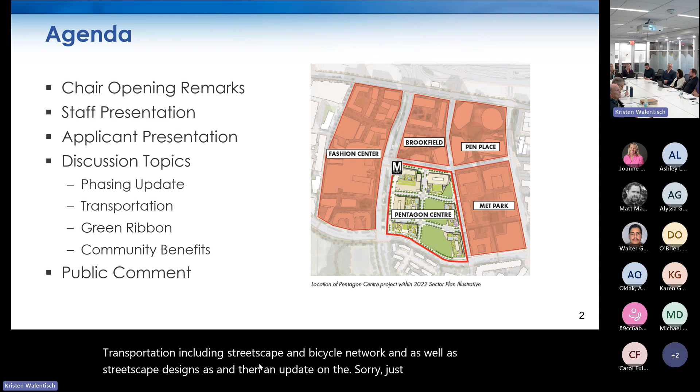We'll have the staff and applicant presentation. Discussion topics will include an update on phasing, transportation including streetscape and bicycle network, streetscape designs, and an update with additional conversation on the green ribbon. If you remember, we discussed this at the first LRPC, but some details have come up that we want to reintroduce to the LRPC and elicit feedback. Finally, we'll discuss community benefits and then move into the public comment portion of the meeting.

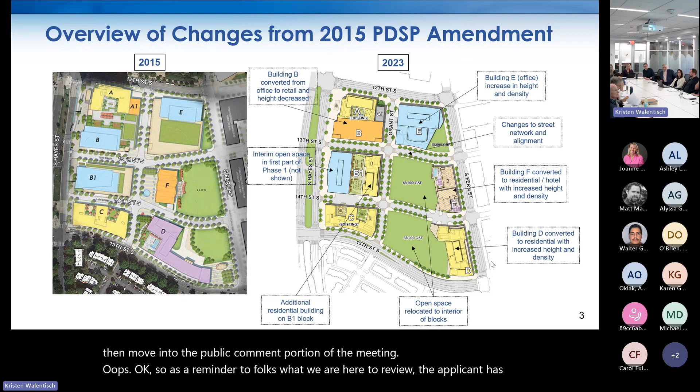As a reminder, what we're here to review: the applicant has submitted an application to revise the Pentagon Centre PDSP to make general changes to the site layout, density, building height, open space, and various transportation-related aspects of the PDSP. This was last amended in 2015, originally approved in 2008. At this time, the request does not include a final site plan for any specific building or block development, so this public review process is intended to focus on the more high-level changes being proposed.

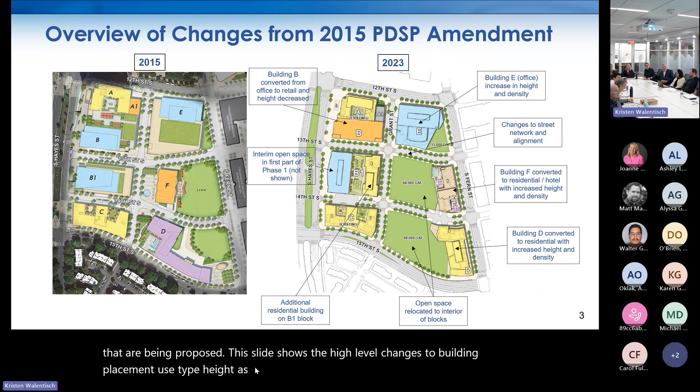This slide shows the high-level changes to building placement, use type, height, as well as location of open space. As a refresher, we went into more detail on this during the first LRPC. These are the Pentagon Centre guiding principles, established in 2008 with the original PDSP approval, to specify the goals and objectives for the site in the nine areas of redevelopment listed on this slide. We will be evaluating the proposed PDSP amendment's conformity with these guiding principles.

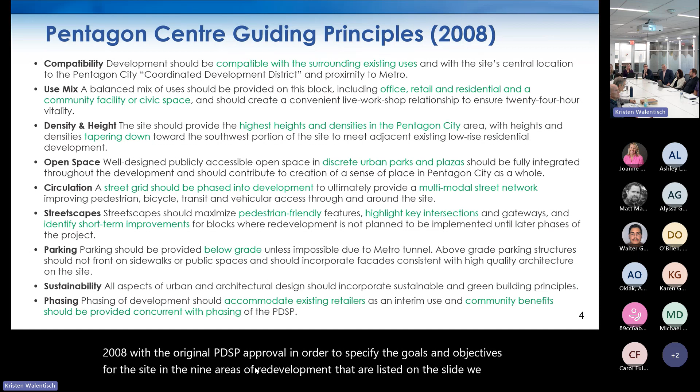Also, as a reminder, the site is the hole in the donut of the Pentagon City sector plan. It's surrounded in its entirety by the sector plan, but the site itself is not located within the sector plan. Although Pentagon Center is not located in the sector plan boundaries, the sector plan utilized the 2015 Pentagon Center PDSP framework to plan for the surrounding area located in the sector plan. We've identified certain aspects of the sector plan appropriate to apply to the Pentagon Center PDSP application, which we discussed at the first LRPC and will continue to discuss today regarding transportation and community benefits.

To help guide our review of the proposal in the context of the sector plan, we have six guiding principles. One question to keep in mind is how the proposed PDSP amendment helps fulfill these guiding principles, or to identify if there are aspects of the proposal that fall short of these goals.

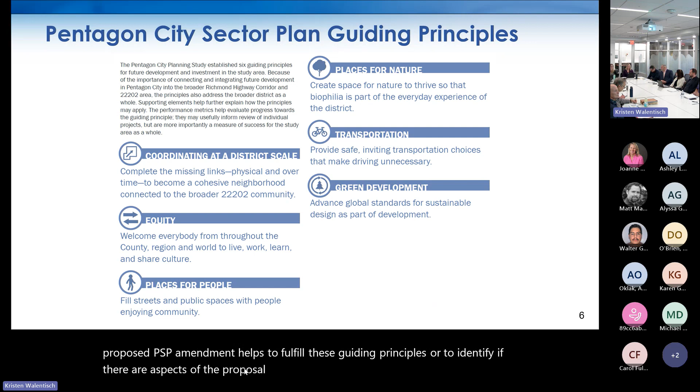Getting into our first discussion topic, we'll go over a quick update on the proposed phasing. As a result of the discussion during the first LRPC meeting, staff raised two concerns to the applicant regarding the phasing. First, the phasing did not account for a scenario in which Costco could decide to extend their lease past the current expiration date. Second, it pushed delivery of all open space for the block to occur within phase 2, avoiding any near-term benefits to the community within phase 1.

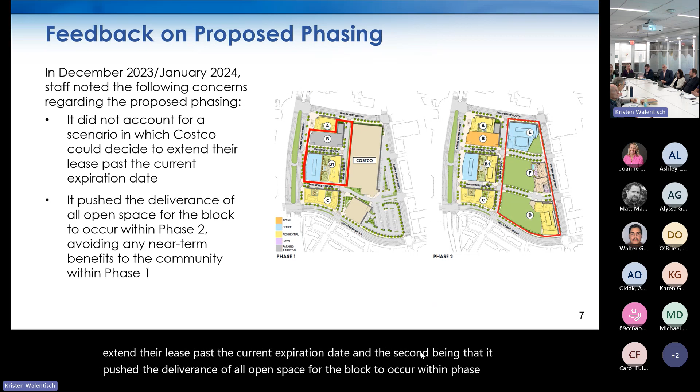As a result of that, we met with Kimco and discussed a couple options to help alleviate these concerns. Kimco has agreed to revise the phasing so that the B1 block delivers an interim public open space along South Hayes Street within phase 1, and then the office building proposed on B1 will be pushed to phase 2. That's shown here, and Kimco's presentation will have more information on this.

A development condition will require that the public open space remain in place until phase 2 is under development, which will deliver the remainder of the open space on the eastern portion of the site. This ensures the site isn't developed with any lack of open space throughout the entirety of the project, that full build out.

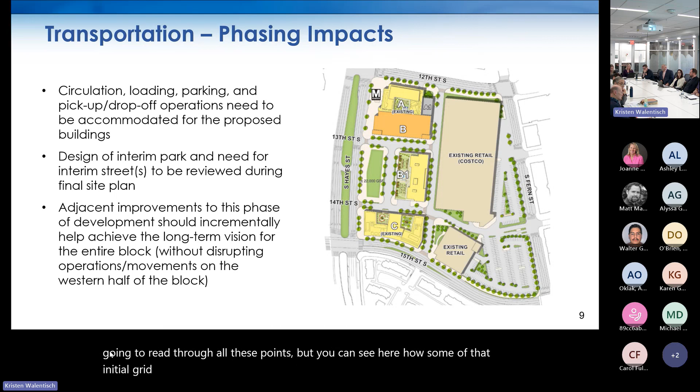Moving over to transportation phasing impacts. As you can see, a lot of what's being shown here resembles the 2015 vision. The phasing impacts, however, I think are going to be very critical to establishing some of the initial street network improvements. I'm not going to read through all these points, but you can see how some of that initial grid improvement, particularly on the eastern side of the block, is likely to be implemented in the next phase, the B1 residential building that Kristen just noted.

Currently, there's a street separating the interim park space from the B1 building. Once that site plan is filed, we'll have a better chance to evaluate whether or not that street is actually necessary, and maybe potentially could expand the park space there, considering that two additional segments, 13th and 14th, are being introduced with that phase, as well as the Grant Street segment that would continue north-south throughout the block. So depending on what the details are of that site plan, that might inform the exhibit you see here, and any further evolutions that might exist.

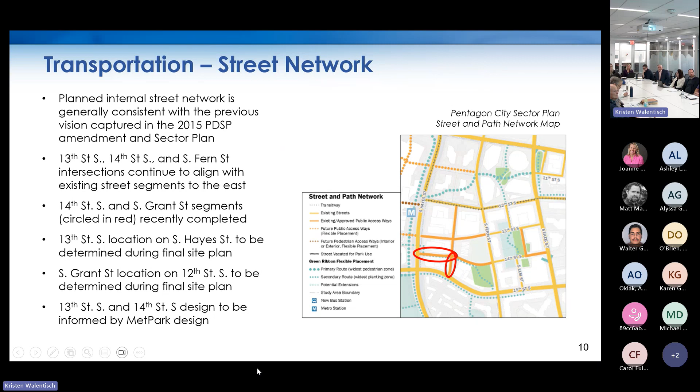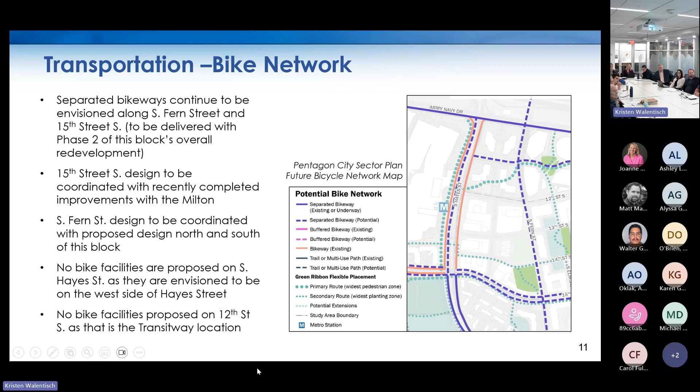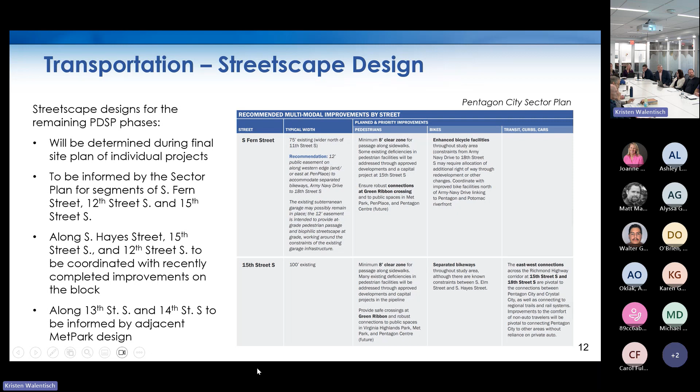Lastly, from a transportation perspective, the streetscape designs are also borrowing heavily from the Pentagon City Sector Plan. Similar segments, whether it's 15th, Fern, and surrounding properties, are specified in that document in terms of the expectation for sidewalks and streetscape environment details. As I mentioned, depending on where we are and which phase of development we're reviewing, we're going to be looking to amend that guidance as well as consider and align with existing conditions that have already been constructed with the first two projects on this block. So depending on where we are in the phase of development, that assessment is still ahead of us at such time as we receive an actual site plan that has more details and allows us to assess what's appropriate. Next slide.

Shifting gears from transportation, we wanted to note the Green Ribbon Network and how this block helps contribute to additional connectivity. The Pentagon City Sector Plan at the time was utilizing the 2015 vision for this block, which informed the alignment of that green ribbon to continue following future segments of 14th Street as it reached the southeast corner of the property.

Future park space was allocated there. Given that open space is being reoriented and reallocated throughout the block, that poses an interesting question of whether 13th or 14th Street should be more appropriate to deliver that green ribbon connectivity and allow folks to traverse the site from east to west.

With this next phase of development, likely looking at the Hayes Street B1 property we saw earlier, as that site plan is filed we may learn more and identify which of the two streets, 13th or 14th, is more appropriate to provide access throughout the site and to future open spaces, as well as the best connection into Met Park and most convenient access across Hayes Street, which is challenging since we're not expecting the west side of Hayes Street to develop anytime soon.

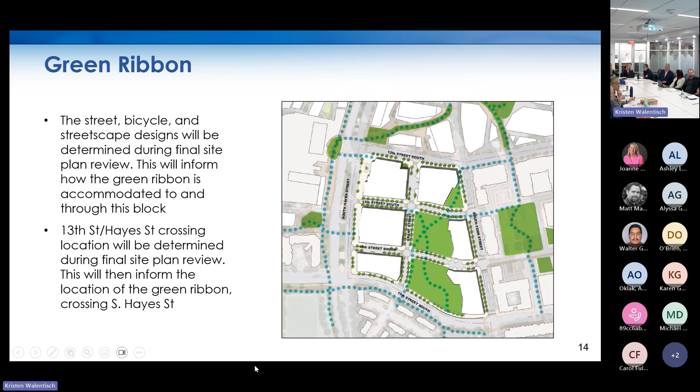We're carrying the expectation, as we look at the next slide, that in addition to the public open spaces, the green ribbon segments are expected to be accommodated on this block. Part of the community benefit structure, similar to what we have in Pentagon City, will be not just the design and construction, but also maintenance of those public amenities throughout the entire block.

In addition to LEED Gold certification or higher, there's also an explicit expectation for on-site affordability. We felt this exhibit, which documents the additional residential density called for in the PDSP update, is a good way to highlight the approximation of what the on-site committed affordable units might be, factoring in where we landed in the 2015 discussions and that density level compared to what's being proposed above and beyond that.

This gives a sense of what that commitment could be based on the information submitted. We're going to continue working to ensure there's an incremental approach to delivery of these various benefits with each phase of development, most notably the open space, which is a critical element for this entire block. With that, I'll hand it over to Chrissy.

We are anticipating this to be the second of two LRPC meetings to review this PDSP amendment. The applicant will resubmit their PDSP plans to address feedback received during LRPC and comments received by county staff during our internal review of the application. The project will then move on to commission and advisory group meetings, followed by county board action, which we now anticipate to occur in late spring, early summer. That concludes staff's presentation, so we'll turn it over to the applicant.

This is big enough. All right, welcome everybody, thanks for having us again tonight. We appreciate your time. Do you want to give a brief introduction? Given the update that Chrissy did, Chrissy and Matt, we have some updates to talk about on our end. Looks like it's not going to work. I've already changed slides on my computer. I won't let you advance. My Wi-Fi isn't very strong in here, I'm wondering if that's it. Maybe Chrissy, do you have it? I have what you sent me on Friday, if that's fine. Yeah, we haven't changed it. Okay, you want to? Oh well, just a little behind, it's very behind.

It's worth the wait. Excited. Hang on. Feels like an art history class—interpret, what's the meaning, the slow slides are coming up. Hang on one second, I'm sorry. Sketch from memory, yeah, two minutes. All right.

I don't know, hold on. All right. Okay. All right, I think I got it. Oh. Okay. Yay, all right, thank you.

You can go to the first slide. We wanted to remind everybody of the overall layout. The metro station is located right next to Tower A, the Whitmer, which opened in 2018. Block C is at the bottom of the page, that's the Milton which opened last June. So really what we're talking about is the remainder of the site in between. Today it consists of what we consider the mall, which is Best Buy, Nordstrom Rack, Marshalls, Five Below, CVS, Newell, as well as the Costco itself and its precast parking garage.

You can go to the next slide. So really, Chrissy covered this, the phasing. Go to the next one as well. This is that phase 1 plan, and really the idea is that B and B1 would be the first things that happen, with the interim park on the office portion of the B1 parcel.

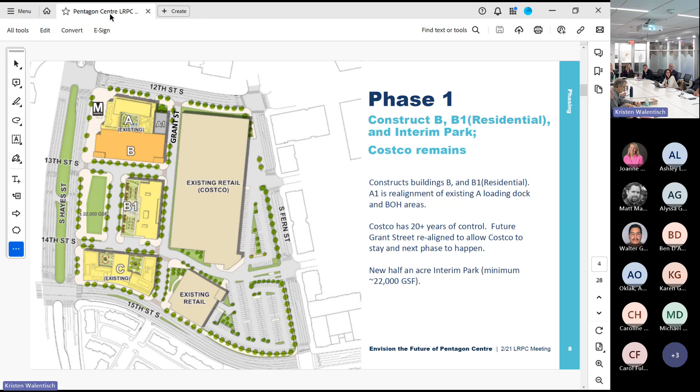Here is the full build out, and we wanted to give you a scenario of what we think a phasing option would be. Obviously this is pie in the sky today, but the idea would be that after phase 1 construction with the interim park, what would happen next is potentially we would open a portion of the park, in this scenario on Block F, that is as big, if not bigger, than the interim open space.

Then at that point in time, potentially the D residential and park would also be under construction. Phase 2B would be the office building on B1, and then the hotel and residential tower on F after the park opens in the previous phase. The final portion could potentially be the office building and park on E. So there's a staggering, but as long as the interim open space is replaced before B1 goes, that would be our proposed phasing here.

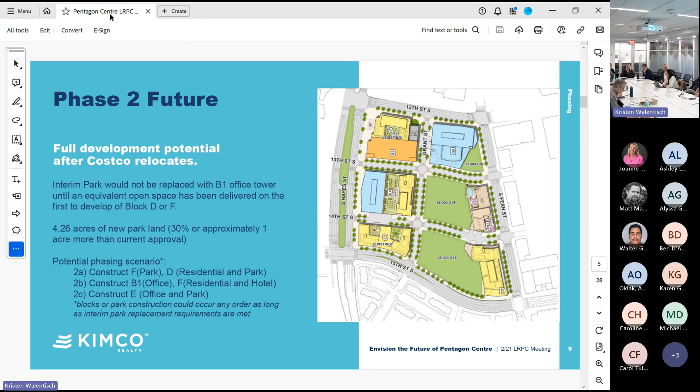Next slide. This is a little hard to read on the screen, but we wanted to share what would happen with the building if there is parking access off this interim road. On the left, you can see the garage is entered off the interim road. Then in the future phase on the right in the box, you can see it basically adds a turn down to the south.

We're still quite a ways off from deciding this, but we want to leave the flexibility for this because we think in the long term, having a ramp entrance across from the park is not the best scenario. So we'd like to leave the flexibility for this just in case, as we figure the details out as we move forward. Nothing has really been finalized, and we'll continue as we move to the site plan with this in the future.

Keep in mind, from this view, the Milton, the newest building, is on the bottom of the page, and its loading already faces this way, which is why we thought it's important to load here on 14th Street, because we already have loading there. That gives us the ability on 13th Street to make it more of a retail street and not have the interruptions you'd have with loading and all that. So that was our thought process in how this building would load, to mirror what we already have today.

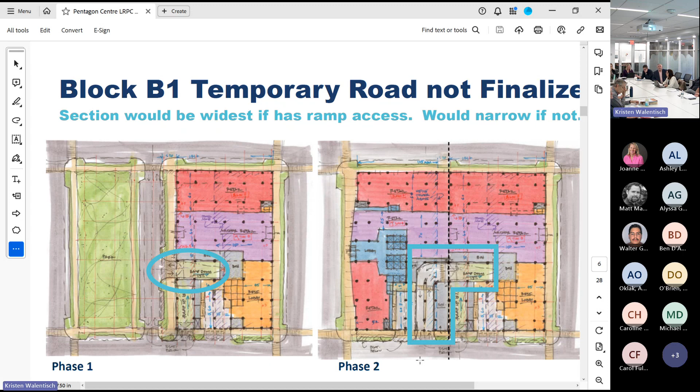That really makes that portion of 14th Street a service street, right? So you have the service back to back, and we create hopefully a great retail environment on 14th Street that gives us back and forth retail on that. Are there any questions on phasing? Because I think this is our last phasing slide.

Not yet, okay, all right. Well, just before you leave that, Abby, is it worth pointing out that interim street we're showing kind of tees up with the existing pathway that connects from the metro to the Milton, right?

Yes, so the path actually, it's just left to where the mews is, from the existing Milton. It does kind of go to the right a little bit, and the end goal would be that it connects you to the future residential amenity lobby of the future building. So that's where the connection will take you after the mall goes away.

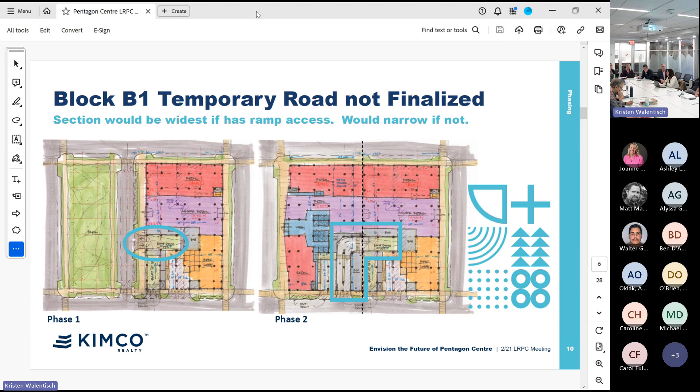All right, we can go to the next slide on transportation. So here is kind of the maps, if you will, from our design guidelines, so you can see what we're thinking about both with the streets as well as the bike lanes.

On the left, you can see that we're thinking about Hayes, Fern, 15th and 12th as arterial streets. And then we've got local streets, both Grant Street and 13th Street. And really we're thinking of 14th as our service street, like we just talked about.

We're adding the dedicated protected bike lane on Fern Street as well as on 15th, where the new development will happen, where we can pull the building back. There is a bike lane today that was added with the Milton on that portion of 15th Street. We don't have the section at this point to add it protected, but the rest of it would be. Hayes Street exists today, and we would be providing hopefully slow streets for sharrows through the middle of the site.

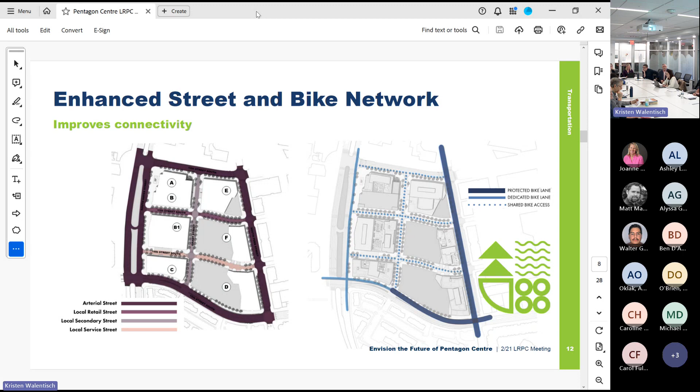Next slide, please. The goal really is we just wanted to let you know how much it is, almost over 1,600 linear feet of new protected bike lanes, which is a third of a mile.

We do want to make sure that we are coordinating with the 12th Street Transitway, so we are working with staff to make sure 12th Street works as that gets added in the future. We'll be having some coordination with staff, but our next application will fully have all of that detail because they shared the latest plans with us.

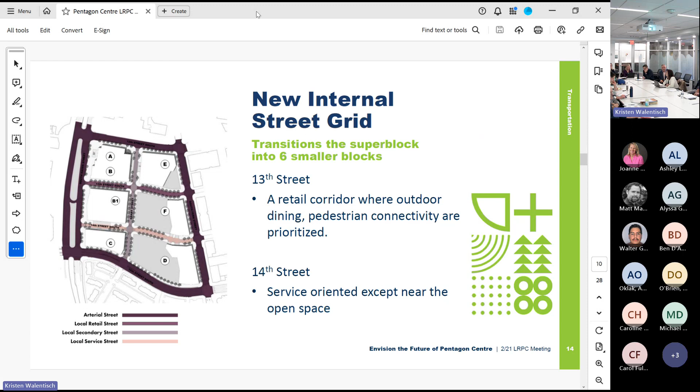Really, this is kind of basically what we've already talked about, but the goal is that we're fully creating porous 6 blocks rather than the super block there is today. You can actually skip 2 slides because I think the next one just says Grant, which we've already talked about.

And so here is the street sections. Again, these are pulled from our design guidelines as well as from the document set. The big thing here is what we've really done is we've added increased width for the step off from the parallel parking. So basically, instead of just a 6-inch curb, you now have 14 inches before you start the 6 foot for the tree planting zone.

The other big difference is what we're saying is a variation from a building zone of 2 feet to 20 feet. And that allows for the vibrancy to have outdoor dining in specific locations, as well as an undulation of buildings for where entry points are. So really that's the big point. Overall the building face to building face could be somewhere around 100 feet if the full 20 feet is used on both sides.

We did want to mention that while we are showing parallel parking on both sides, there is an opportunity at the parks and on our retail street to close it for events, so we could have the ability to create celebration streets in those environments.

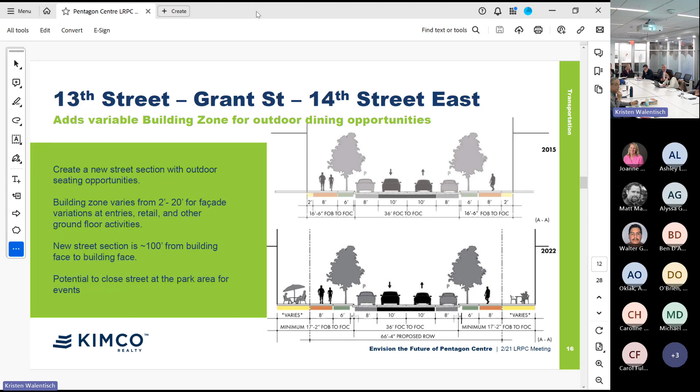We don't have a dimension on how much this is because it does vary. The property line is not parallel to the roadway, but that is in the document set for where that is. If you go to the next slide, while we have not shown the bike lane on the other side of the street because it is not our property and we don't know that we would be able to redo the curb, it does fit within the street section.

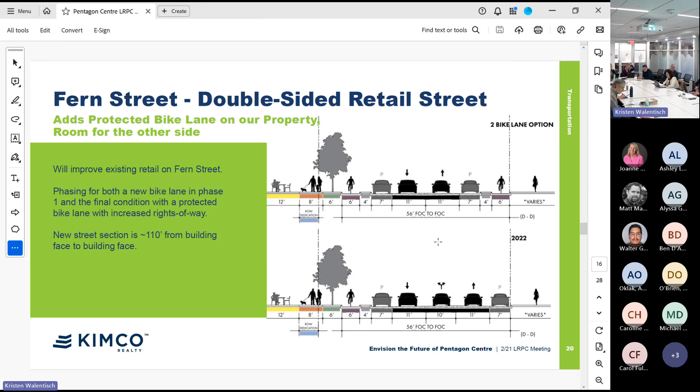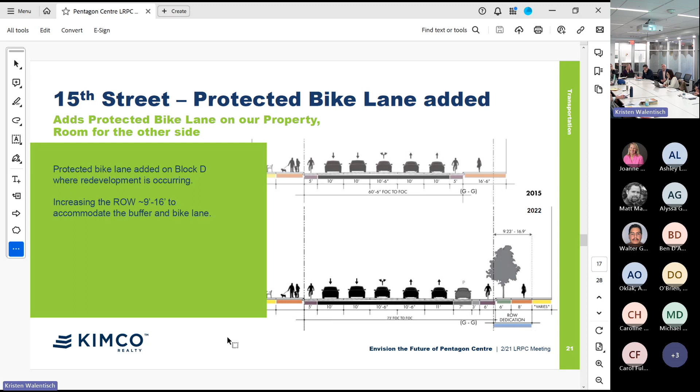The next slide is we do have an MMTA study. Staff has reviewed it and we are awaiting comments, so hopefully we'll have all of that with more feedback in the future. Are there any transportation questions?

Just one other point on the bike network: where feasible, we are trying to provide protected intersections on our corners as well, especially at the corner of South Fern and 15th. That is also on the set. That's a good point—we did not include intersections in our design guidelines.

Are there any other questions on the street sections? All right, we can move to the next one, which is the green ribbon.

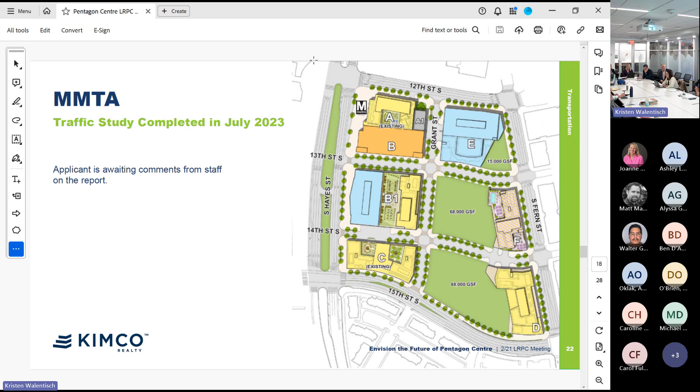We just wanted to go back and really talk about the connection that we see, this southwest to northeast connection that connects Virginia Highland Park up to the future Pen Place through the open space.

We do believe in and agree with a public process to design all of the open space as a master plan, so that all 3 blocks are coordinated, both in designs of the streets as well as designs of the crosswalk locations, as well as with the buildings. Our current proposal is to do that prior to a site plan submission for any one of the future 3 blocks on the Costco side. That way the first block can come in already with the approval and having that master plan done at that point in time.

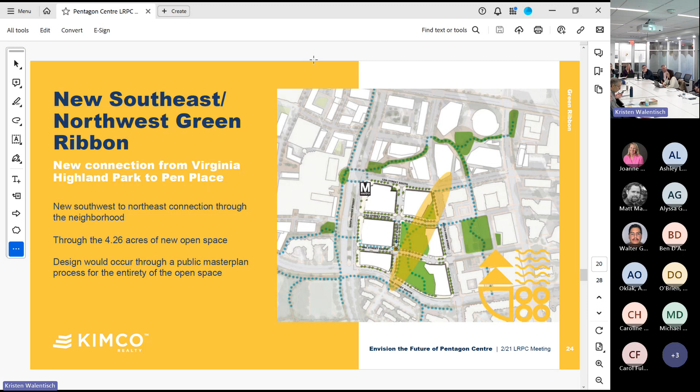The next slide really talks about why we're concerned about what an east-west green ribbon pathway would look like. Obviously we've talked about this a lot. 14th Street is our service connection, so there will be a lot of conflicts between cars going into parking garages, loading, trucks. There will be a fair number of retail here still, so we'll still have deliveries as well as move-ins and whatnot in these buildings. So we do think 14th Street has a lot of conflicts, and we want to talk about that.

On 13th Street, if we put a full green ribbon path through here, we do think it would somewhat limit the ability to make this section a celebration street that could close for events. Again, we don't know that it's the right or wrong answer, but we do want to talk about the pros and cons.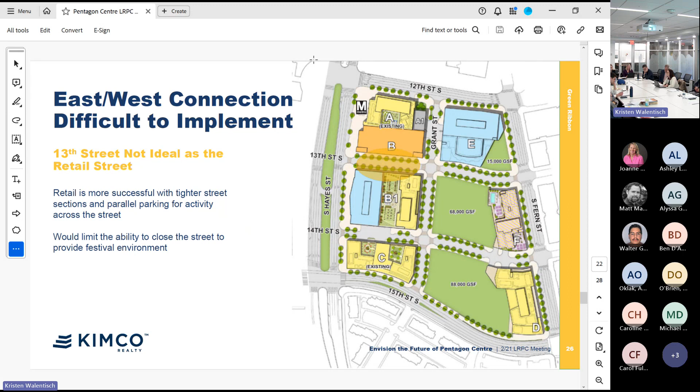If you go to the next slide, we do think there's an opportunity to do something a little bit interesting here that could be different than the full green ribbon segment. We want to work with both you and with staff to come up with something creative, because the 3 blocks on the west side of the property are an urban condition, and the green ribbon is really seen as a path going through open spaces. So this is an opportunity to create something interesting through an urban condition. What does that look like? Could it be a double row of trees around the sidewalk? I think there are design solutions we could come up with, but we want to be creative and make sure we figure out what that is, rather than just saying it needs to be a green ribbon path through there.

So I think really this diagram is to show that we could do it on either of them. We just need to be careful about where we put it. And we're open to suggestions as well as creative solutions.

Can I just add, Abby, it may be obvious to the group, since the approved plan was approved by the board in 2015, obviously the Pentagon sector plan process hadn't started. The word green ribbon and the concept of a green ribbon hadn't been determined at that point. So I just want to point out, these are not conditions that are proposed changes. These potential conflicts and issues Abby just went through aren't being triggered by our proposed changes. They're just things that have come to light in response to the concept of the green ribbon in the Pentagon City Plan, and we just want to flag it for the group.

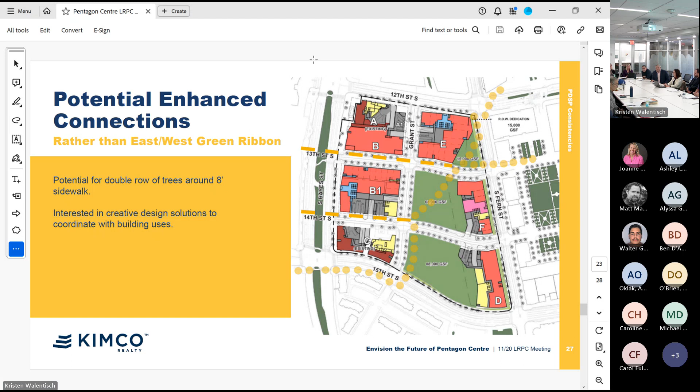All right, next slide is community benefits. We talked about this a lot last time - there is a 30% increase in open space. We are going to try to hit the 10% affordable housing, and we are going to add the bike lane. Those were the big things that the sector plan asked for the Pentagon Center site. We will try to hit the 40% tree canopy, as well as add a new southeast-northwest green ribbon connection.

And then the next slide really goes back to the big 6 items from the sector plan. I think the thing that's on here that wasn't on the previous is we do believe in following LEED Gold for new buildings. Kimco's current ESG standard is LEED Gold for all of our buildings as well, and I'm sure as that evolves through time, as we build the next step, that will change as well. So we'll be following both what the county requirements are as well as our own internal standards.

And that is our last. So, can I start off with a softball question?

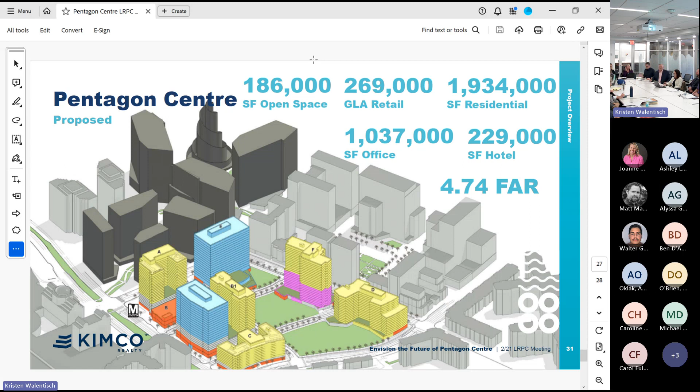Maybe I'm late, but can you explain the logos that show up in some of the slides? It's like a code - I feel like I'm the only one who doesn't know the answer. You can ask my marketing people because I actually don't have any idea, I'm just using slide templates. It kept changing, I'm like, I just need to decodify it. I don't think there's anything to it - you get 12% affordable housing if you can figure it out. I don't think there's anything magic to it other than I just used a slide template that had different ones on there. They're pretty though, right? They are pretty, obviously eye-catching. Very distracting.

Some hieroglyphic, make something up for next time. Yes, the squares mean parks. I don't have any. This was our submission for the new county logo a couple of years ago, obviously.

All right, the two business people, come on. Thank you. Is that it? You're done with your presentation? Yep, that's everything.

All right, any clarifying questions or any comments besides the graphic design aspect of the presentation? On any particular topics? Well, just from the presentation, if you had anything that needed clarification before we dive into the topics of phasing update.

I was wondering on the slide with the new plan supports all 6 major sector plans, slide 30. It says meeting affordable housing 10% goal and meet 40% tree canopy, but when you were talking about it, you said we will try to do those things. So I was wondering, is this like you're going to try but not necessarily guarantee, or you are going to? So the goal is to meet both of them, right?

So obviously the 10% housing goal, obviously that's a square footage, that'll be a condition, we'll meet that. I think our only hesitation on the 40% tree canopy depends as when we do the public master plan design of the open space, can we actually hit it, right? And so if through that process we decide we need a big open green to do a movie night, well, then I don't know that we can hit 40%.

So the calculations we've done so far basically show that like 90% of it needs to be treed in order to hit 40%. So I think we just want to leave ourselves some flexibility as we work through the master plan of the open space to make sure we can do both things, right, if that's what's asked. So the goal is to hit it. However, we also want to hit what the master plan asks for. So I think there needs to be some push and pull given those two things.

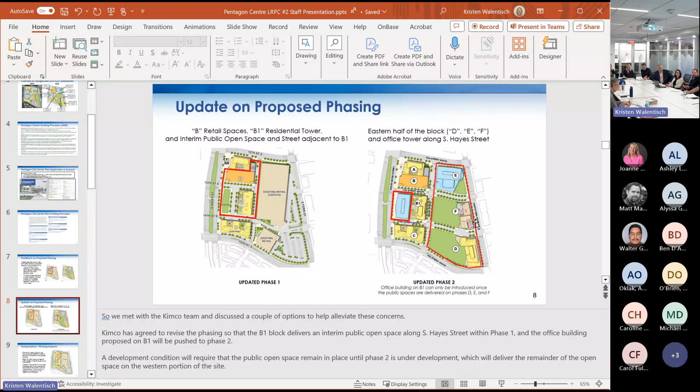Since this is an interim park, are you all covering the design process, the building, and the maintaining of it, or is the county covering aspects of those? I'm just thinking the county taxpayers would want to put a lot of money into something that's interim. We designed the existing park we have today, what we call Grant Street Park, and we maintain it. So this would be the same configuration. We would build it and maintain it, with the caveat that when we come in with the B1 final site plan, I would imagine staff in the county would revisit that with us, and we would have the conversation we usually have, which is for a half acre.

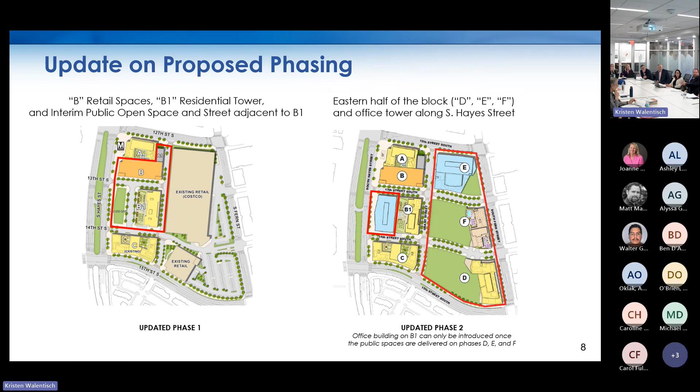I don't want to promise anything, Greg, but I have a feeling the county is going to want that to also be a little bit public. I know Walter is on the phone with parks, but I would imagine we would likely be asked to go through a public planning process, even for an interim park, given the potential it could be around for a significant period of time. And so sometimes the applicant pays for that process. I would imagine, in my experience, we would, because that would be part of the site plan process, folded into it, and we would work with staff to have additional meetings. Walter, I'm talking your territory here.

Yeah, no worries, Evan, you're hitting all the points. Commissioner Tinley, we definitely work with the applicant, like any other site plan project that involves a public space. We would try to wrap it in with hopefully the SPRC and do an engagement process to get that completed once the project goes to county board. And to your other question about who would maintain it, that's usually a conversation. In this case, I suppose it would be a park easement. It's an interim park, and I would suspect the county would have us, the applicant, maintain it.

Great, done. All right, I will now go to Ben D'Avanzo.

Thanks, I have a couple of questions, or groups of questions, that if the chair is okay, I'll group into one question and ask another after, since they're about two different geographical areas. For the area around B1 and 14th Street, I'm interested as to why there needs to be that interim street connecting 13th and 14th to the west of building B1, and why there couldn't instead be access to building B1 from 13th and 14th. Also, if I understood the presentation correctly, you said B1 would initially have parking access from that interim street but then switch to 14th Street, and I didn't quite understand that. So that's one set of questions.

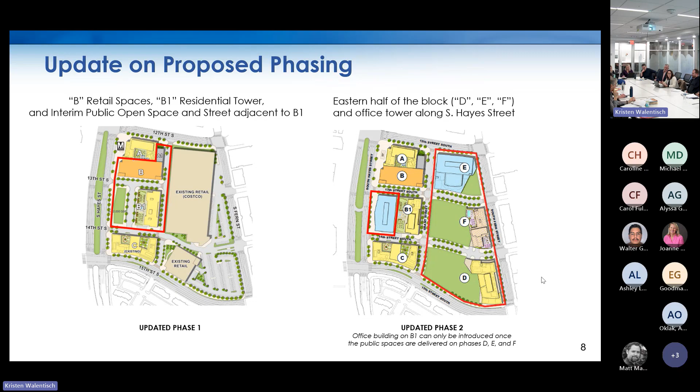Okay, so starting with the interim street: it really is there today as a drop-off for the future B1 building, and the parking location hasn't been finalized. We have drawings where the parking is accessed off of the park side. So let me take a step back.

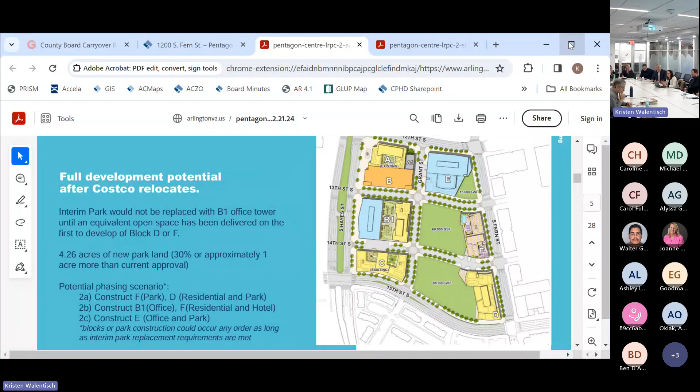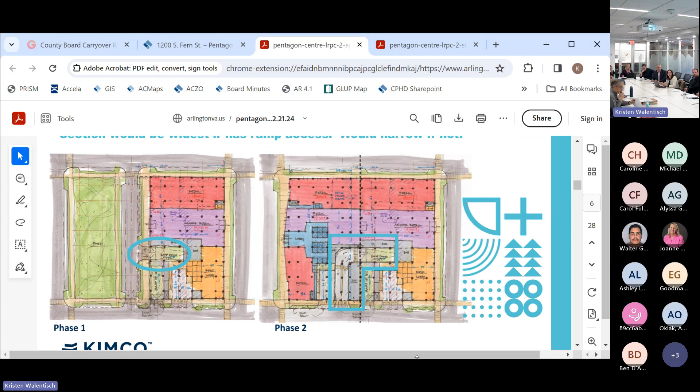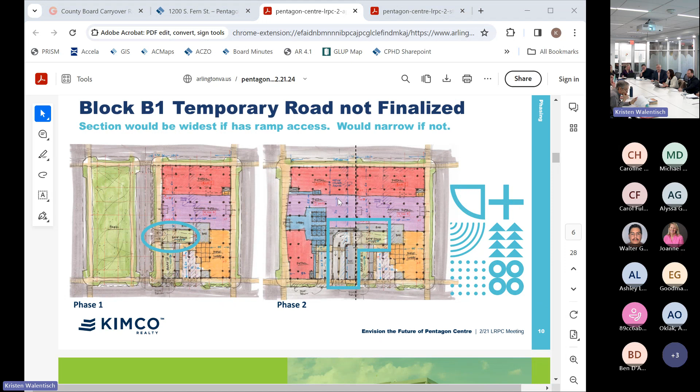When you only build the residential portion of the block, there isn't enough width along 14th Street to provide an up and down ramp situation required to meet parking entrance needs. If you recall, because of the metro station, the blocks along Hayes can only have one level of below-grade parking. As a result, we have to have down and up ramps to solve the parking needs on these blocks. So when you only build the first phase, the residential tower, there's not enough width on 14th Street to provide the loading docks as well as an up and a down ramp.

So in order to do that, the alternate situation is: where do you locate the other ramp in the interim? This scenario shows that second ramp off the interim street. We also have a scenario showing the second ramp off of Grant Street. The issue is, in a long-term scenario, when the park is built, we don't think a ramp going down is appropriate across from a park. So you have to come up with an alternate solution.

So this is the alternate solution that would provide the down ramp access off the interim street. When the block is fully built out, we would have an on-grade connection to the down ramp from 14th Street — so you're just moving where your access point to the garage is. Again, we are not at site plan for this block, so this is kind of scenario planning at this point. This is just showing that we may need a garage access here, depending on what we decide to do in the future.

That's really the point of the interim street — to provide some short-term retail parking as well as access to a ramp if it goes off that side. So hopefully, I think that was the first question.

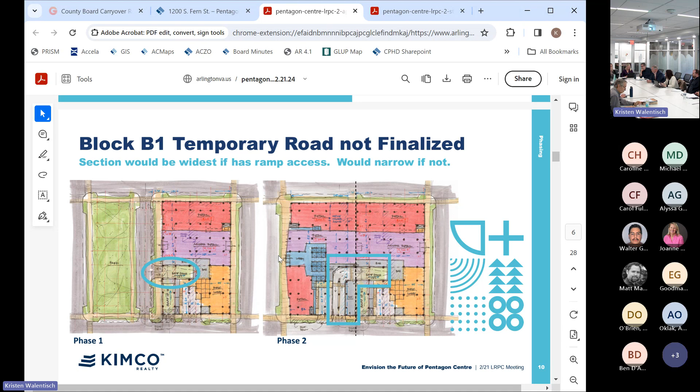Just real quick, from a staff perspective, to add to that: taking a step back and looking at the hypothetical — if Costco decides to stay, which, again, they're popular and it's very likely to happen — and if that park were to remain more of a permanent condition, I think that decision alone becomes more critical. We want to make sure we start with an expanded version, and perhaps the focus and emphasis is placed on the design of potentially future park space on the rest of the block, such that it can design around the entrance and wherever the parking and loading access is.

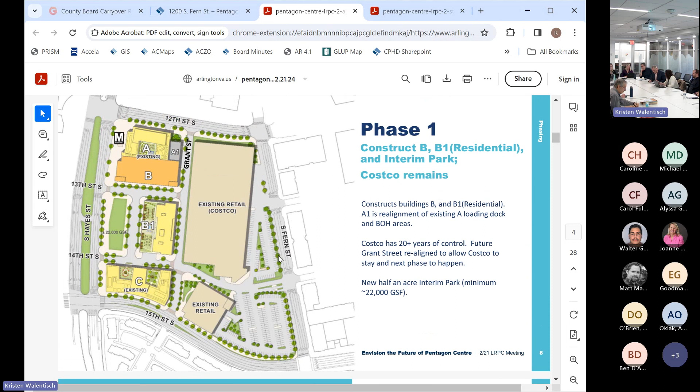Because that could be done, knowing if it's there, but I'd hate for that opportunity to forego the expanded park space, given that it very likely could become permanent. Correct, and I think that's a perfectly good scenario, and at this point we don't have an answer, so we're just trying to hedge our bets 50-50 one way or the other. The challenge for us will be if there are drawings associated with this year's PDSP amendment — the degree to which they guide or inform what the expectation or consensus is.

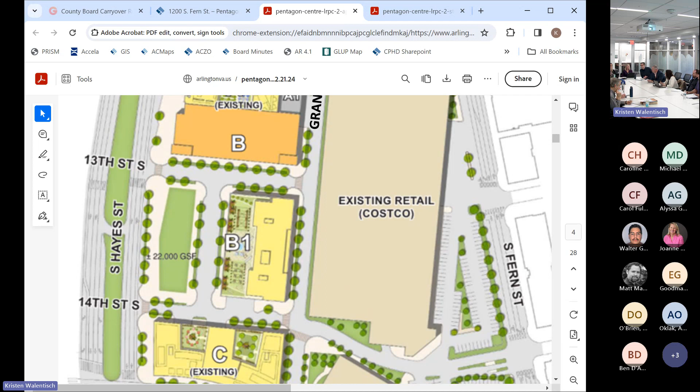And right now, that seems to be alluding to that we have support for the street, or in fact, maybe that needs to be amended in a way that shows further study is needed and the preference is to get as much park space as possible. However we want to do that. Okay, I think we can definitely work with that.

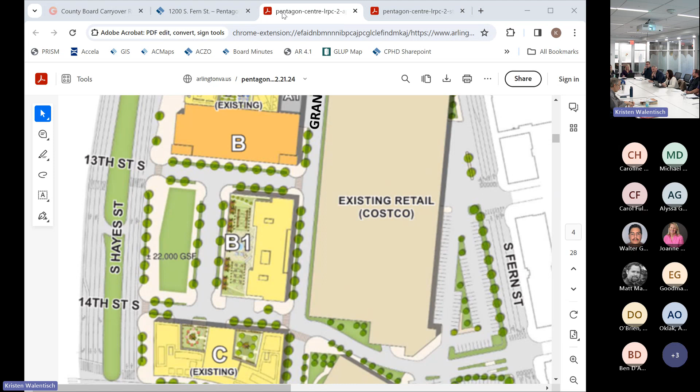And then the second question was the Costco access. Yes, so as long as Costco is around, the gates as they are located today will stay for access to Costco parking. The main reason is that's Costco's entrance, and everybody comes in and out of there. And as a cut through, it's already interesting with people cutting across in carts and everything, and it's not a through street.

I don't think with Costco's entrance there, it would be a good condition or a safe condition having that as a through street. All right, Ben, is that good? I'm going to go to Ms. Fuller. Carol, you're on. Okay, thank you.

My comments actually are related to what both Ben and Matt just said because I wanted to talk about the park. I'm pleased to see that since the last LRPC, you've added that interim park in there. But I think we all need to realize that the issue of Costco is like waiting for Godot. It may never happen. And therefore, I would hate to see an interim park be set in stone at the site that it's at right now and the size.

And I would go back to what Matt just said as well. I wanted to say, I really would like to see that park space expanded more. And even though you've given an explanation for that street, I find that interim street really is not a good idea. It would be better to expand the park over there.

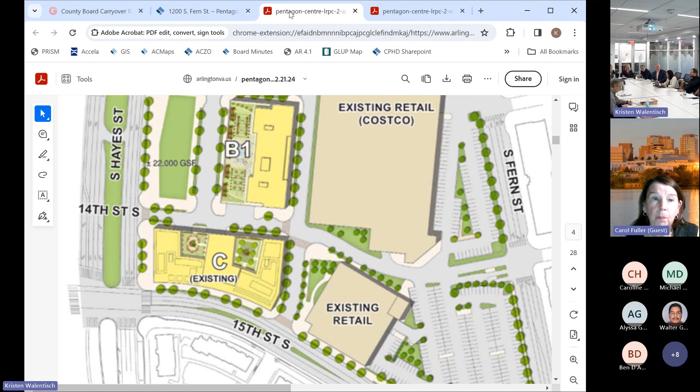And you did mention the ramp was a problem for you. I made a note of it when you said it in the first place. But I would just hate to see anything get set in stone that way, as to the fact that you can't do a park if Costco never goes away. It should be larger. That's my key issue.

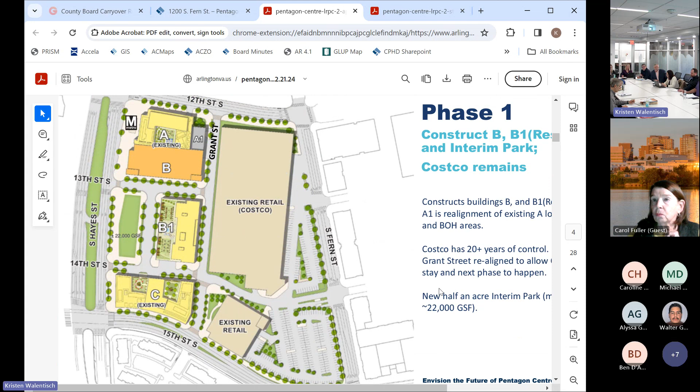Thank you, Carol. All right, the next person is Michael Dowell. Hi, I think Ben covered most of my question, but I just wanted to check if for the Costco condition, I think we're all focused on how semi-permanent phase one could be.

It wouldn't be a through street, but would Costco be restricted from making use of the west side of 14th Street? So if, are you asking, can customers to Costco come in off of Hayes to 14th Street to access the Costco port? Yes. Okay, good. Yeah, because, if you didn't hear Greg, that's the condition today.

Okay, you can turn right in on 14th Street off of Hayes already, and so you can go basically straight down 14th to kind of the gate to go into their parking lot on the other side of Grant Street already today. Yeah, not many people use it.

I would offer that in my experience, Costco got a lot more organized when they really restricted most of the traffic to coming in and off Fern Street. Ironically, when it had more heavy use of the Hayes Street entrance, it actually made the traffic a lot worse in the area. So you might want to keep that in mind.

Yes, it is really kind of the secondary minor entrance, and I do think less people use it. However, there are some people who kind of park in the parking garage who sneak in and out that way. Okay, thank you. Great. Thank you, Michael. The next one is Caroline Haynes. Sorry, I'm having a hard time seeing the screen, so give me a minute. I'll get there. Great, thank you very much.

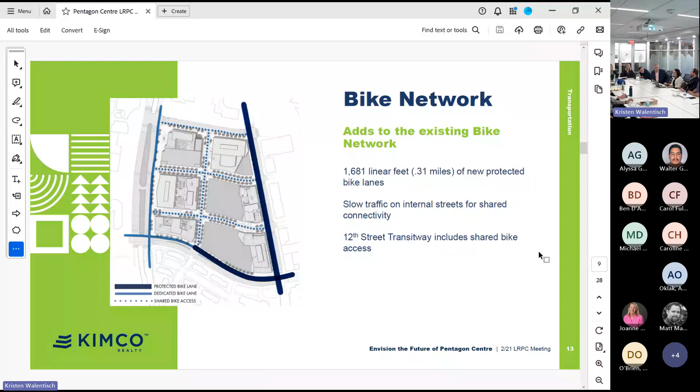So the end goal would be that we would build the westbound ourselves, and what we're providing would allow for an eastbound lane. However, that's not our property and we would have to get all those things. So that's not currently in our thought that we would build that, but we are leaving room for that. We want to encourage that.

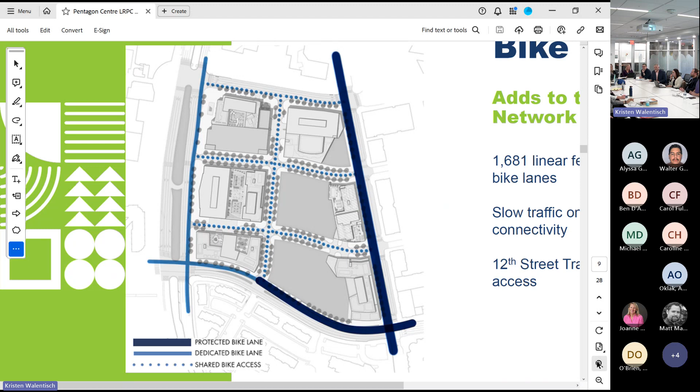It seems like we're getting a lot of southbound lanes without getting a lot of northbound lanes, and I'd like to see more balance. Once we get to 15th and going south on Fern, there's no plans for any bike lanes, period? That is a true statement. Yes, there are no planned facilities on Fern between 15th and 18th. All the way up to 23rd? Correct. That's too bad. We don't anticipate any redevelopment.

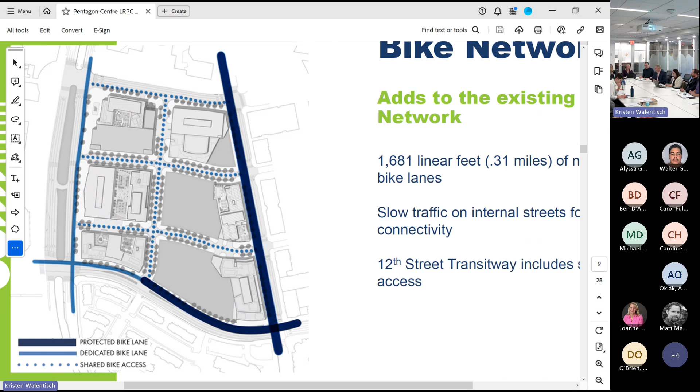Before we leave transportation, there was a question that Commissioner Lantelmi had - we discussed the extent to which vehicles would be allowed on the new internal street at the last meeting, so follow up on what seems appropriate. Are there any comments on the amount of traffic that we're allowing on the streets or expecting, per the conversation we had at our last LRPC?

I don't think we're doing anything to constrain the streets, so there'll be a lot of what's happening internal to the site. Once you come up Grant and 13th and 14th, it's really local serving traffic that's going to be using those 6 blocks. Most of the traffic that you see today around the periphery will still be periphery traffic to get to other facilities, like broader in the area.

We didn't see any operational issues internal to the site, stop controlled intersections along Grant Street, so no new traffic signals internal or anything like that. I was going to ask too, because that made me think - if I'm remembering right, there was a lot of parallel parking spots on the street that was cutting into that. I wanted to know what the logic was, putting all that on the internal streets instead of in the parking garages or any other facility around there.

Really, it was just a continuation of the previous PDSP where we had all our streets lined with on-street parking. Yeah, and my thought on that was that if we're trying to make those more pedestrian friendly, having rows of street parking is - I understand there might be a necessity to it, there is a retail component, we can't forget that. But if there's any examining on that angle of it, seeing how much could be preserved for pedestrian access.

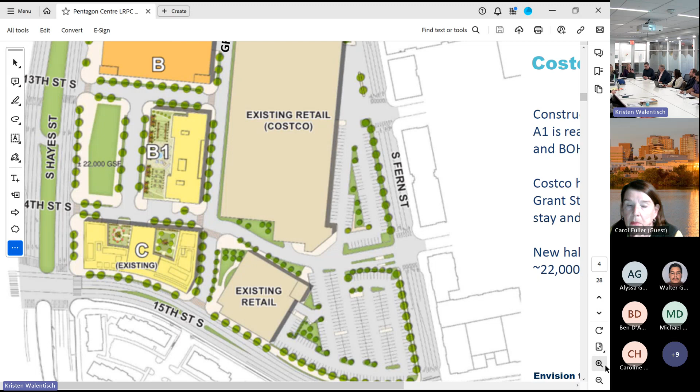All right, thanks. Ben, do you have a question? No, I'll pass.

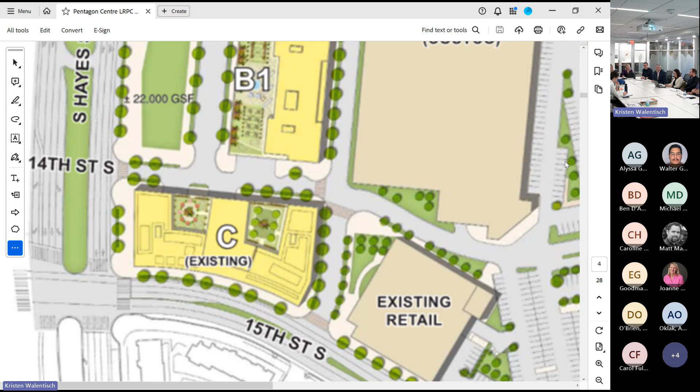Okay, for the sake of time, moving on to green ribbon. I feel like we've talked about that a little bit, but if we have any comments, questions, or thoughts—remember, LRPC level, SPRC level, we're at the LRPC level, always a tricky line, I understand. Any hands, anyone in the room?

Matt, were you gonna say something? Yeah, I'll start things off. It's really, I think, in response to the 13th Street connection, the green ribbon, which seemed like it might be predicated on the ability for the site to block that off for events—the degree to which that's supportable, I'm not sure—but the green ribbon is specifically identified in the sector plan with a menu of options to design it.

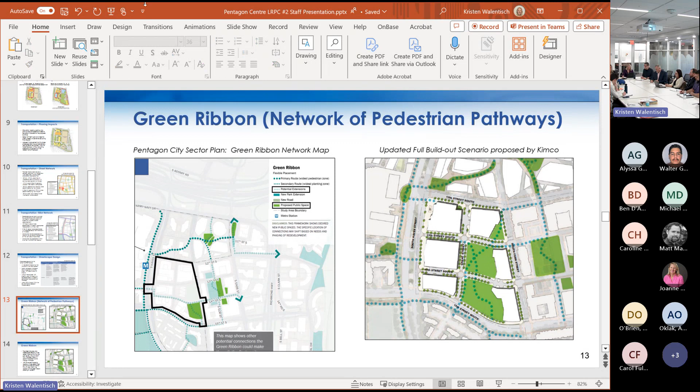We did that strategically because it passes through private properties and along right-of-ways, so it's meant to be adaptable and applicable just about anywhere in Pentagon City. I've struggled to envision where the conflict might be, regardless of the value of retail or other uses on 13th. There's probably a design solution that allows us to achieve the full cross-section, and part of that is it's much more than just double lining of trees.

There are specific elements that lead to that, depending on what's happening on Hayes and what Brookfield might do to the north, which might inform River House at the same time—some potential test cases of how they solved it on their site, all of which are unique. There's really no apples-to-apples comparison to Costco. But it's something we want to keep open, particularly since the next phase, when the site plan is submitted for B1, might actually solve that for us.

And set the stage for the west side—east side, sorry. I'll jump in and react to a comment made during the presentation. Abby, you mentioned creativity about the green ribbon, and I think that's great—I'm always encouraging creativity. The only thing is, let's keep in mind the green ribbon serves a certain function for fauna, continuity, and pollination. We don't have Bernie Byrne online today, but he could go on about butterflies and all this connection. So let's make sure as we're designing that, we keep some of those biophilic agenda items attached to the ribbon.

All right, I'll go to Caroline Haynes. Okay, you basically said what I was going to say—I think when we were talking about it, Matt knows this better than any of us, the green ribbon really is as much a part of connecting those green nodes as the actual parks are. So, to keep that in mind, wherever this ends up, it needs to be very intentional that it's contributing to that concept of the green ribbon and really connecting those natural spaces. So thanks, Leo.

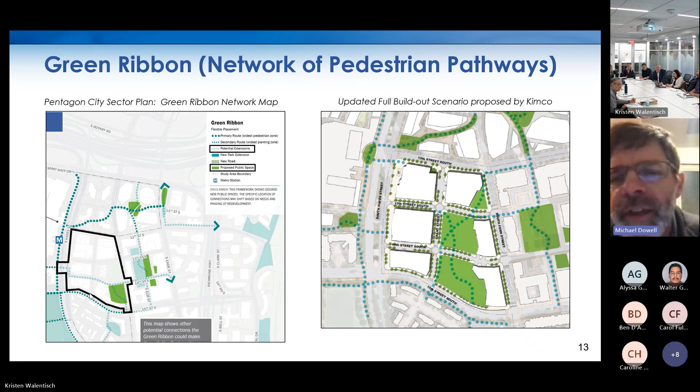And I think it really helps with the green ribbon in the invitation to come into that space. But when you look in the center building on the west side, that's just a box. I think if you could do something interesting with the northeast corner of that building to kind of ease the way into the green ribbon, it might actually help 13th Street feel more green ribbon. Do you see what I'm saying?

See how those three buildings on the right side are all kind of funky shapes? If you could do something to soften that corner at 13th Street and Grant, it might go some distance to making that feel more biophilic.

And then the other thing I wanted to point out, I wasn't sure, where are there any spots where we actually will have retail literally on the park, not across the street, but on the park? Can you give me some insight into that?

So right now there's anticipated to be retail on the park on Fern, which is basically right where the mouse cursor is on the screen right now. And then the current building plan, obviously this is to be determined, there are also lobbies and back of house, like residential and hotel amenities that would be on the park as well. Those are not precluded from being retail, but I think right now we're focusing retail on Fern Street and on 13th Street.

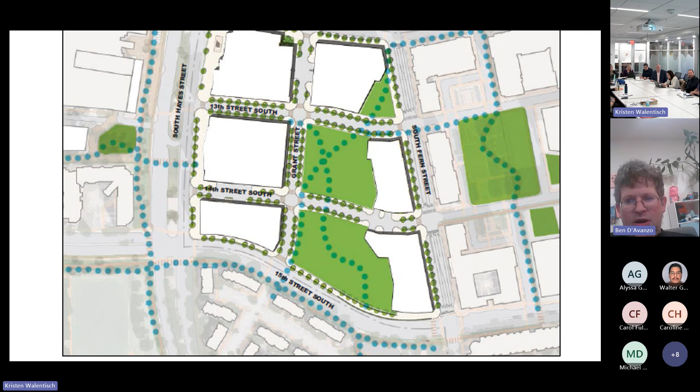I wanted to address in the green ribbon a couple of things, both kind of concern that the green ribbon crisscrosses the parks in the way that it does, which really limits the potential uses of the park once there is a master planning process, and does kind of preclude, for one park or the other, a potential open space process, and kind of makes it, here's where there should be, due to the design guidelines of the green ribbon, which are really great, but which are much more about kind of traversing places.

So just expressing that it would be much better if it went along 14th Street, which is the real entryway into Met Park on both the east and the west, and encouraging that. Also going back to some conversations that happened during the Pentagon City sector plan planning process, and coming from really putting on my Southampton representative hat.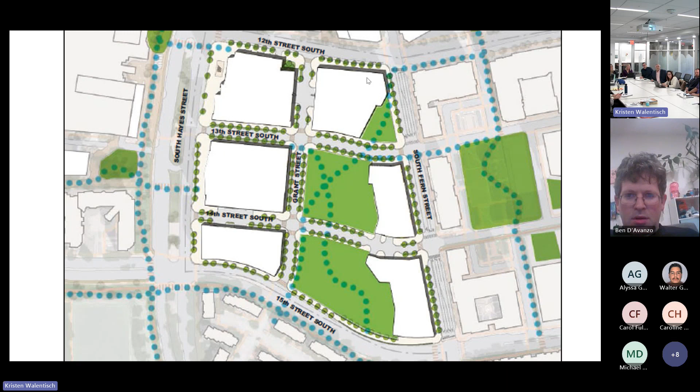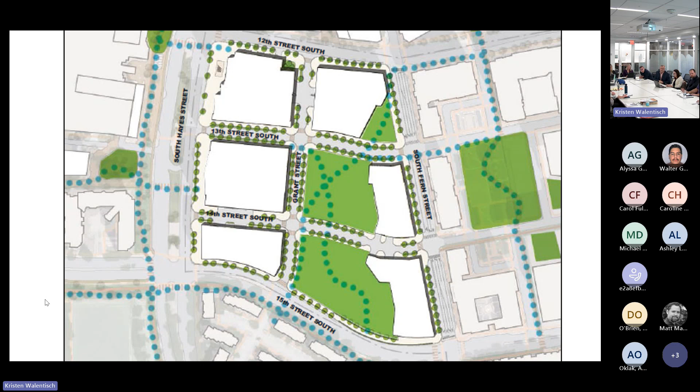I have a question for staff, kind of about thinking of the user experience when they're on the green ribbon. So a lot of the projects we've been talking about, it's a path that cuts through a block. It's not necessarily supposed to be a utilitarian space to get from point A to point B. It can be used for that, but it's also a poetic experience to interact with nature and get away from the urban feel. So what is the feeling when it's along a sidewalk, when it's really for pedestrians getting somewhere? How is the design experience different when it's along a road where people are trying to get to Metro really fast versus going through River House, where you might sit down and read a book or something artistic? Well, I'm done speaking.

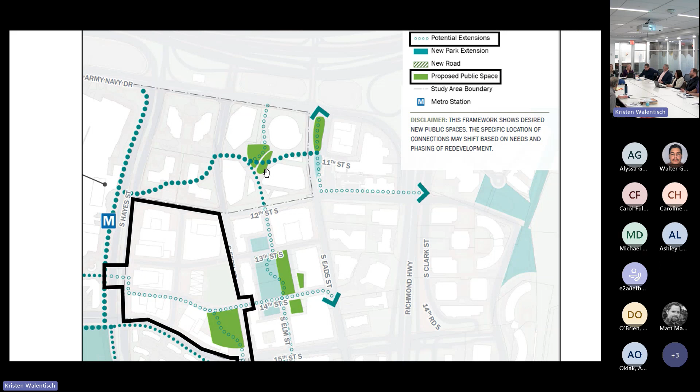I'll see if I can pull up - we actually have a great PDF that our consultants prepared during the sector plan process that visually describes this much better than I can verbally.

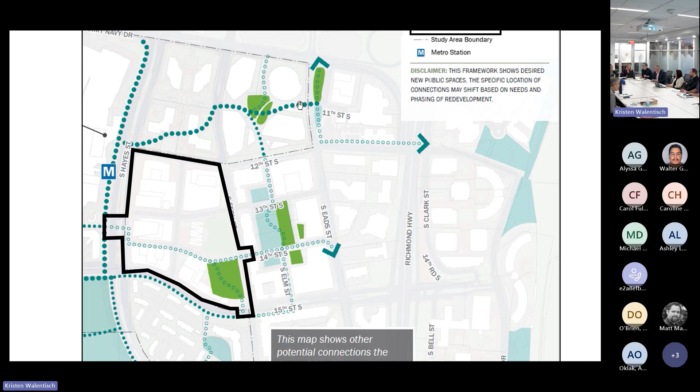But generally speaking, in the areas you described, there's a variation in the green ribbon where we emphasize the clear pedestrian zone to be widest. If you look at the menu in the appendix of the sector plan, it speaks to a range in feet that the width is expected to deliver. So in those areas, we want that width maximized, as opposed to the more private sections of the green ribbon where we want the landscape areas maximized, and the pedestrian pathway is not as significant there.

So there's some of that, but there's also the additional buffering that you have. It's not just utilizing curvatures, but also the right plantings, spaces where you can sit down and have a rest stop. There's also opportunities for public art, lighting - a lot of different techniques to enhance what we typically might see otherwise in the streetscape environment.

Let me dig around, I can pull something up. I'm going to add on to what Matt was saying while he digs up his PDF.

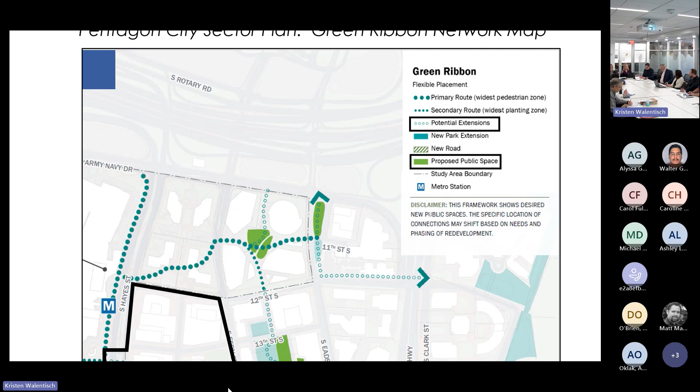I think the other thing, as we're thinking about the green ribbon, it is to connect those green areas. We had these discussions with Pen Place, with Met Park, and some others. It's almost as if you're going to have this path for folks who are running late, who just want to get from point A to point B - that straight shot. But I also want to make sure I have that other path, so if I have some time, I want to hang out with my friends, eat lunch. Making sure we have both options, depending on where it is, is what's going to be important.

So when we look at 13th Street, it may not have a lot of curvature or sinuosity, but maybe the sidewalk is not 8 feet, maybe it's 12 feet wide, maybe it's not one set of trees but 2 sets of trees. Realizing it's probably more of a straight line path A to B, and then when you get to that park area, you have those options - do I continue on 14th Street, 13th Street, or Grant? But I also have this option potentially through the park.

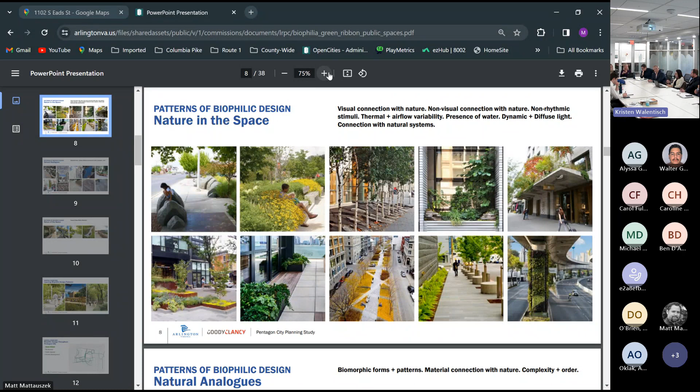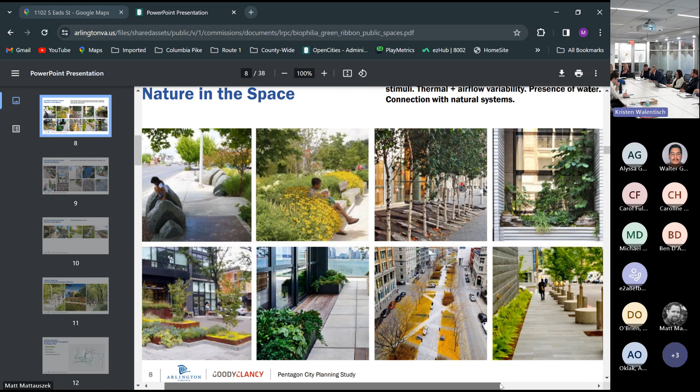Again, looking at Met Park, we have a lot of pathways through there, but you could also just go along that street frontage. That's what we want to make sure we're thinking about when designing this area. We also don't want to limit those options through the park planning process, so that's going to be that discussion when we do the park planning - do we want a lot of pathways through there, or make sure that pedestrian route is around the perimeter with more open green area that doesn't have a lot of pathways through. We just want to make sure both options are available to folks and they still have that green experience. We don't want them just walking along 12 feet of concrete with buildings - that's the last thing I want.

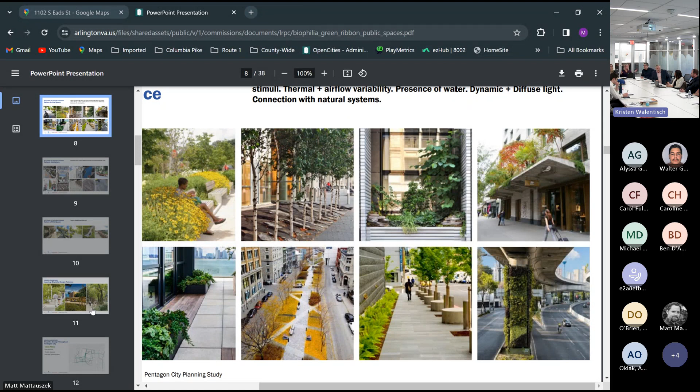And I think I talked enough that Matt found his picture.

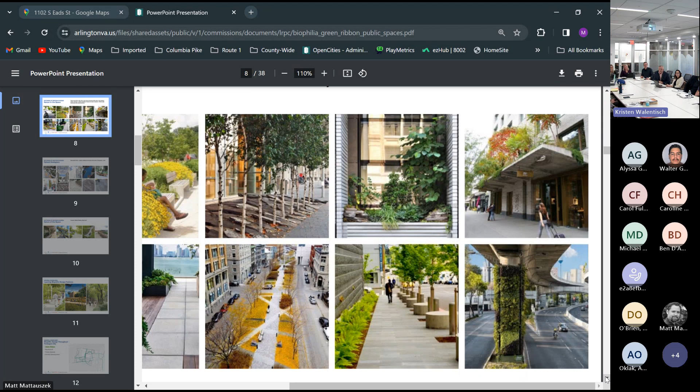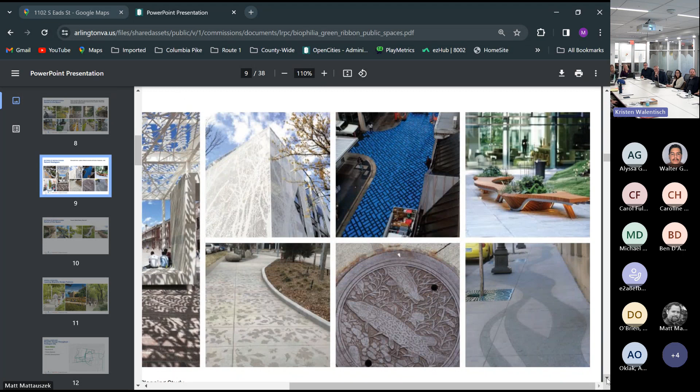We can post this online, but there's a series of photos, precedent images from other cities and jurisdictions showing creative solutions. I'm going to scroll down to the solutions, things like paving patterns, the type of seating, introducing various elements to the width and overall experience. This is another good one that continues to show up, and the PDF has tons of examples of what that could look like, really exaggerating what we typically see in a streetscape environment. That's when you know you've achieved something more intentional and intuitive, and folks can read, oh, this continues, I can see the pattern going from block to block.

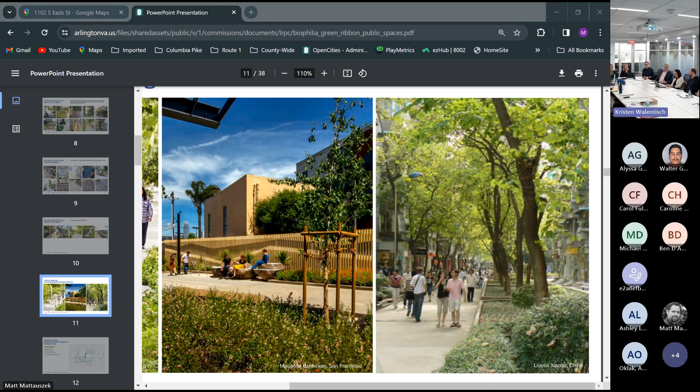No questions? All right, well, it is a little tricky to talk about community benefits at the LRPC level, right, anything very specific. But it might be worth discussing if people would prefer 90% of this open space having trees on it in order to get 40% tree canopy, versus maybe using the park for something else. Or is that too early to discuss now?

It is a little bit, I guess, just thinking out loud here, it seems a little more park master planning, but it doesn't hurt for us to have that conversation and provide some direction for the team as they start to put pen to paper. So do you want to start off that conversation about balance?

I think it's an important question that might already be decided by the time, like some of the, I guess it's phase 2, so. Yeah, no, that's probably my point, far out. I think maybe I'll call on Ms. Haynes if she had anything to add about orientation, that she's willing to impart on open space versus trees and plantings and how to achieve a sort of sweet spot on that plan.